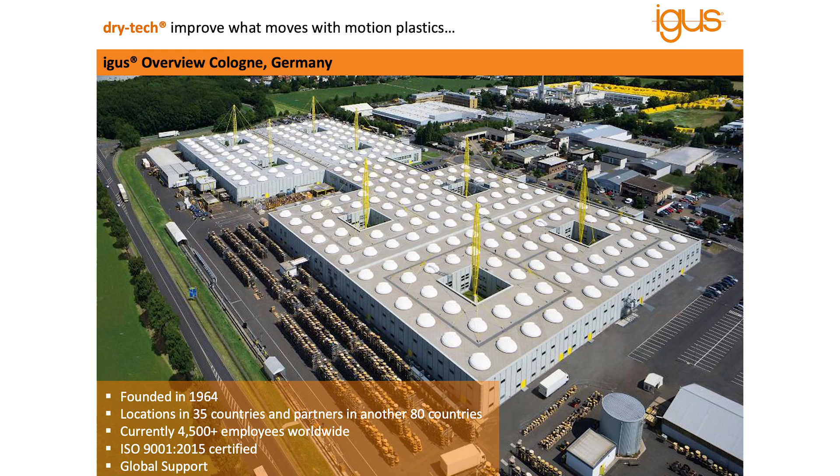I'm going to talk about igus Incorporated now, here in East Providence. I'm in our East Providence facility, and here we have just under 500 people in North America between the US, Canada, and Mexico. About 120 of those are factory trained outside salespeople who do offer on-site consultations as well as Teams calls. We have plenty of support.

We have groups of product specialists and inside sales here in Providence as well. From this facility, we ship about 85 to 90% of the product same day. So if you call in with an order in the morning, you can rest assured that if it's a stock part, no modifications necessary, we should be shipping that part same day. We also recently put online an injection molding facility here in Rhode Island at one of our older buildings.

We have headquarters of about 225,000 square feet. We actually have a couple of other buildings with just about the same amount of area, where, like I mentioned, we do injection molding and also have some off-site storage. We're also expanding here in Providence, where we have a lot of land that we're going to be building on in the next couple of years to expand and better support the customer base.

What are motion plastics? I mentioned that earlier. igus develops composites that are specifically used for motion projects. That can be anything from a bearing or an energy chain system. So when I say energy chain, I'm talking about the things that would guide and protect cables and hoses in dynamic applications. Something like this would be an example of one used on a lab device.

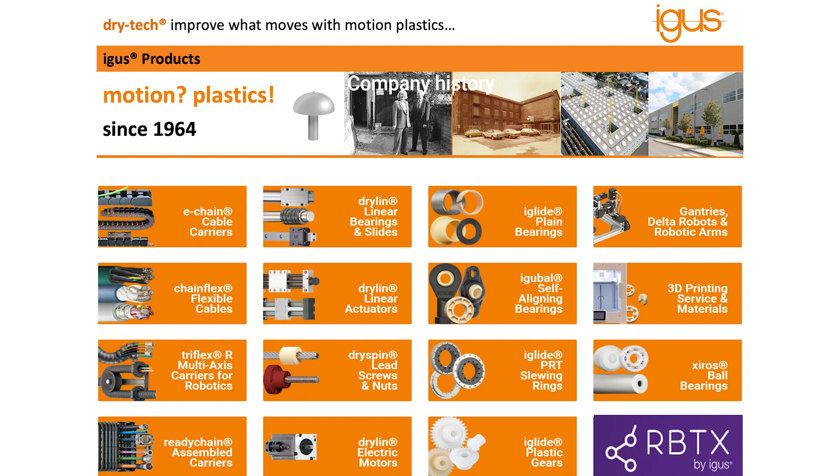And before I get into that, I should talk about the polymers themselves. So what is drytech? We do not provide simple plastic solutions for customers. We've been developing composites for linear motion and pivoting motion since the middle 60s. We use base polymers to get the general characteristics of the bearing we're trying to develop. That will dictate the speed, load, and characteristics for temperature.

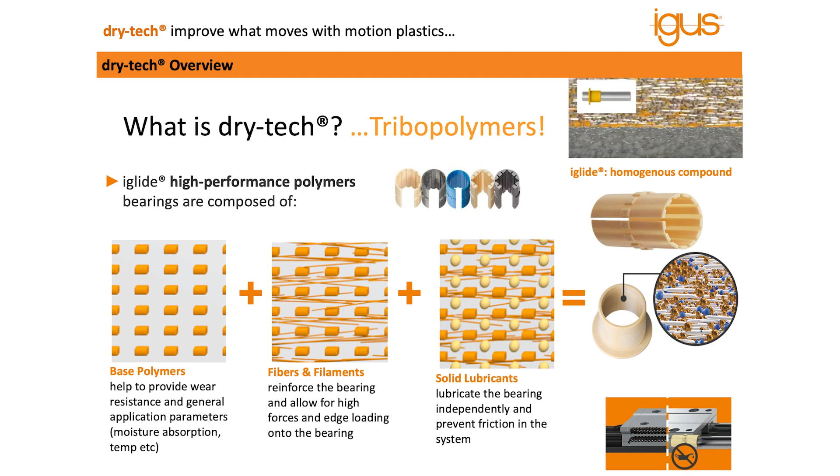To that, we add fibers and reinforcing compounds, could be carbon fibers, could be glass fibers. Into that, we also introduce solid lubricants, such as Teflon or silicone, although we are working on PFAS-free bearings as well, because we know that's a growing concern in the market. The main thing about all of our bearing materials is that they don't require lubrication. But how do you know they work? Well, igus has the world's largest motion plastics test lab in Cologne, Germany.

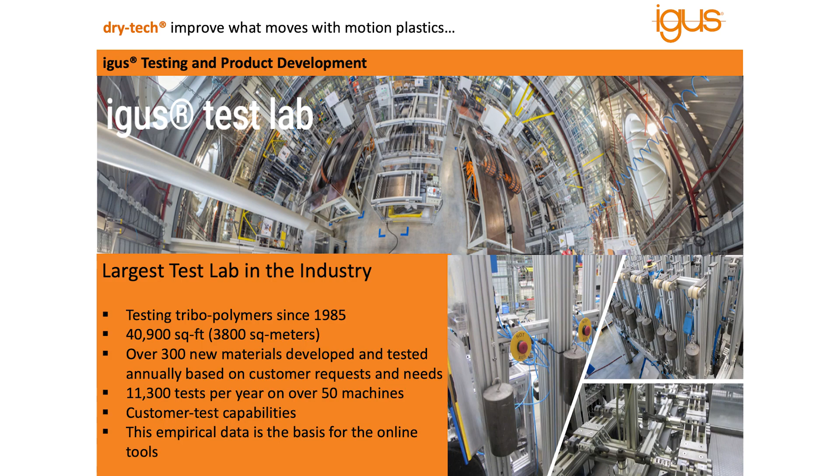We test over 300 new materials every year. We have 11,000 tests that we conduct across all the product lines. All of this information gets filled into our online configurators and expert systems, which I'll go through in a second as well.

Now, the main benefits of these composite plastics is that they don't require external lubrication. Basically, the bearing, as it moves along a shaft or guide rail, deposits its lubrication on the microfinish of the shaft. That never needs to be reapplied.

There's no maintenance. It is always intended to run dry, clean, and free of any lubrication. Aside from that, they are extremely lightweight. Our linear bearing systems can be as low as 25% the weight of linear ball bearing systems. Because they're plastic, they're very vibration dampening and quiet, about 4 times quieter than linear ball bearings as well.

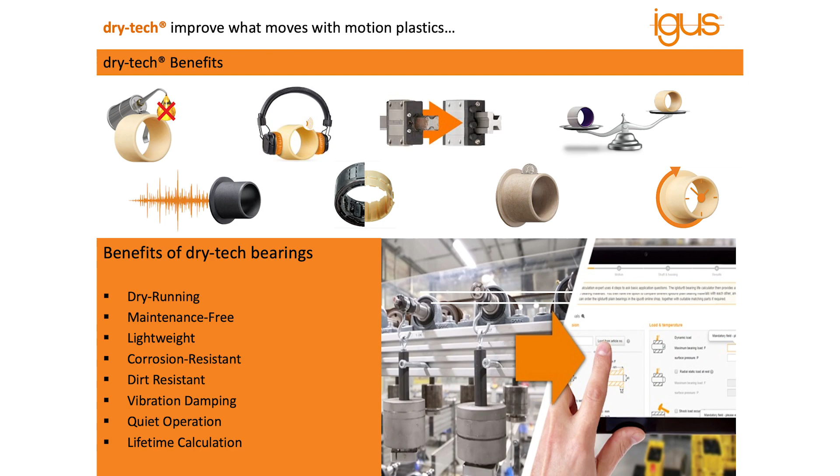And because they have no lubrication, they lend themselves to work very well in dirty environments, but also sensitive, clean lab environments, as you'll see in the next few slides.

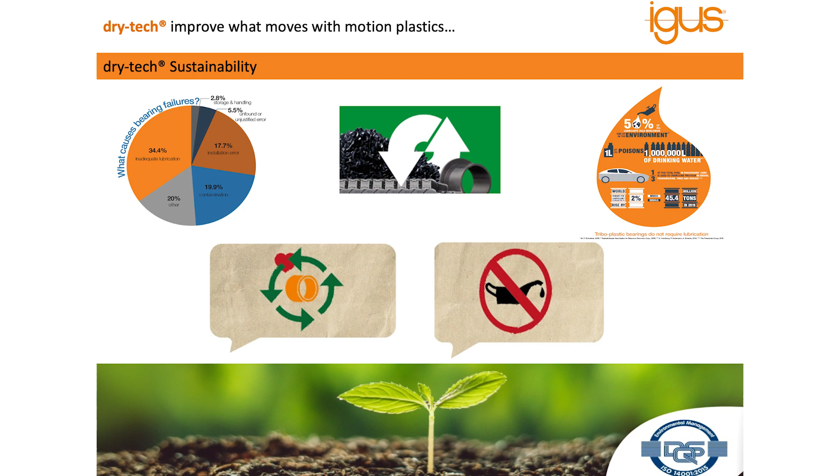igus is committed to sustainability. We realize we make plastics, but less than 0.5% of all oil consumption actually goes to the creation of engineered plastics. So our plastics are meant to improve machinery and remove any wet, oil, or grease lubrication in machines. Roughly half of all lubrication used in industrial use ends up back in the ground.

Also, more than 54% of all bearing failures are actually related to a lubrication issue, whether it was improperly lubricated or there was some contaminant in the lubrication. With igus, you don't have to worry about that.

Also, we use 99% of all of our waste material. Sprues from the injection molding process are reground and used for other purposes, other materials at igus. As well, last year alone, we planted more than 45,000 trees as part of an initiative to stabilize the carbon footprint.

But what is Drylin? I said that word earlier. It stands for dry running linear bearings. As you'll see here in a second, we offer more than just the linear bearing, but everything again is intended to be quiet, lubrication free, and work well, particularly in lab applications.

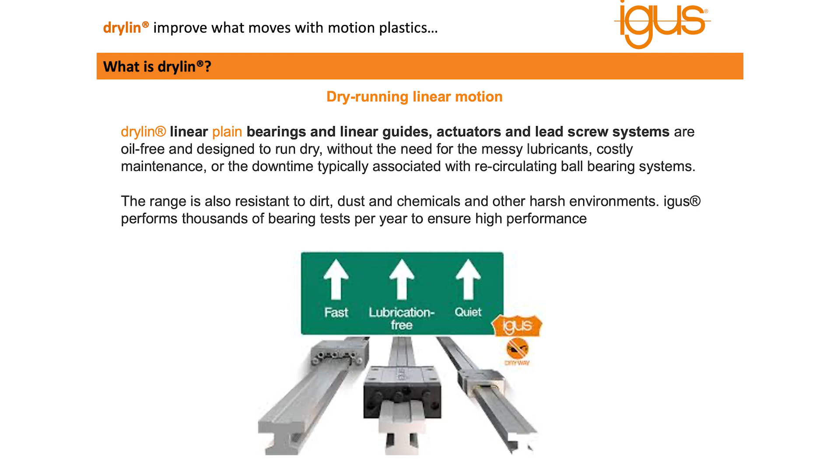So the product range itself ranges from our Drylin linear bearings and components. You can purchase just a simple liner from us. I shouldn't say simple, these are actually highly engineered for linear motion, but a liner from igus all the way up to a turnkey linear actuator, which could include sensors, cables, as well as our D1 motor control unit. So we have all sorts of options.

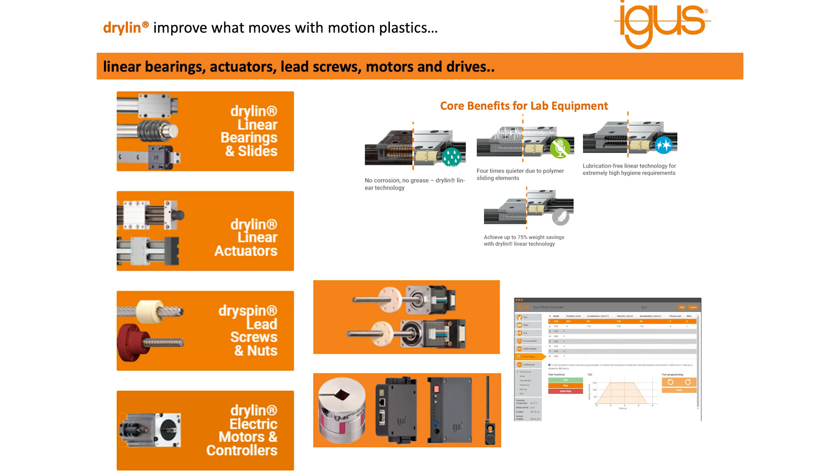We also have a lead screw series we call Dryspin, and we have tons of motorized solutions for that as well. So how does Drylin differentiate itself from ball bearings?

So most of our competition does make recirculating ball bearings. They do require grease and oil. There are certain times, of course, you need maybe the precision that a linear ball bearing has, but you're paying maybe for more and you're having to introduce lubrication into the system.

So whenever you can, we'd like to help you find ways to utilize Drylin in those applications. And because they're dry running, they work well with shocks, corrosion resistant. I'll go over materials here in a minute. They work well in dirt, and again, they're 4 times quieter and considerably less weight than linear ball bearing systems.

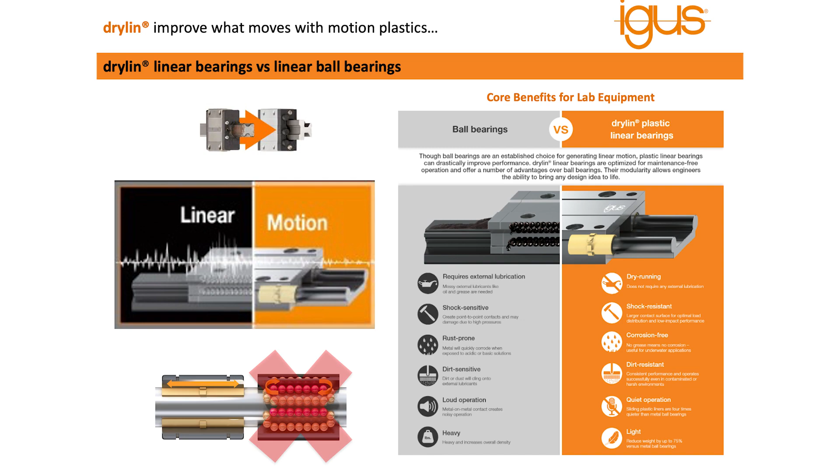There are a number of copycat parts that might look like Drylin in the marketplace. I kind of wanted to go over igus in particular because we've been developing these compounds, these bearing materials since really the 1960s. But Drylin first came out as a linear bearing product line in 1996.

The first material we used was this yellow material, which we call iGlide J, which although it was from 1996, we still use it in almost, I would say, most of our linear bearing applications. It has the best combination of wear and technical properties and costs that a lot of our customers are looking for.

However, we realize that there are applications sometimes where you want higher loads, or you want extra corrosion resistance, or you need to be maybe resistant to some moisture. We've developed other compounds for that. One of them we call X. X is a material that's capable of withstanding temperatures of up to 250 C continuous and is universally chemically resistant.

A newer material, this blue one here that we've developed over the past few years, is the latest version of our FDA compliant linear bearing material. We call this A160, and this works very well not only with chemicals but also with stainless steel shafting.

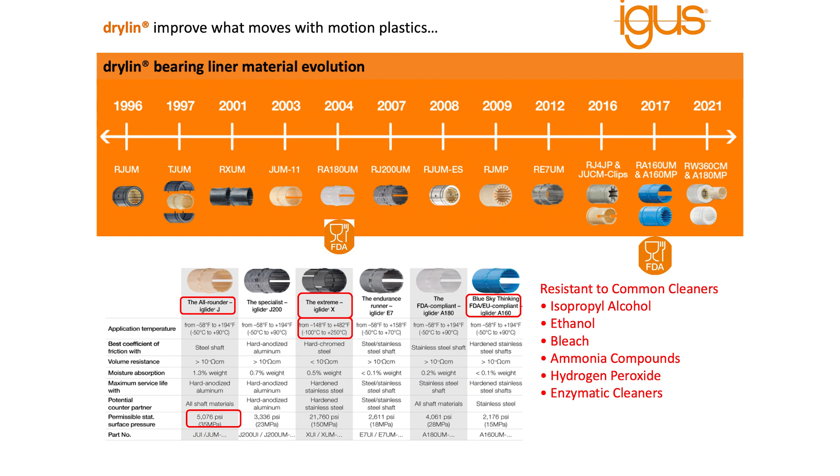All of these work with common cleaners in the lab related industries. They're listed here: isopropyl, ethanol, bleach, ammonia. They're resistant to those chemicals. You don't have to worry about the introduction of them into the bearing system.

As far as guide shafts, rails, and lead screws, the most common ones we supply to lab automation projects are stainless steel. One big benefit of using a dry running linear bearing, a plain bearing, is that it can work on soft shaft materials.

We actually have systems like this belt drive here that are based on soft stainless steels, 304. We have systems that are completely 316 if you need the ultimate in corrosion resistance. And all of our lead screw products are 304 stainless, or at least they're offered in 304 stainless.

We have housings made of stainless steel, and then a lot of the product lines we use in lab automation involve just a standard hard anodized or standard anodized part like this one here.

All of our guide rails come cut basically between 2 and 4 meter lengths in the back. There's no cutting charges. We cut them to your requirements and ship them out same day.

We have low cost zinc, which isn't always the best solution for chemistry in certain applications or chemicals, but we offer them in stainless steel as well as hard anodized aluminum.

If you're an OEM worried about the bare ends where we've machined or cut the rails, not only can we anodize the part complete, but we also have full machining capability for custom holes and custom drilling patterns in your parts. I should also note, most of this presentation is geared towards lab or diagnostic machinery.

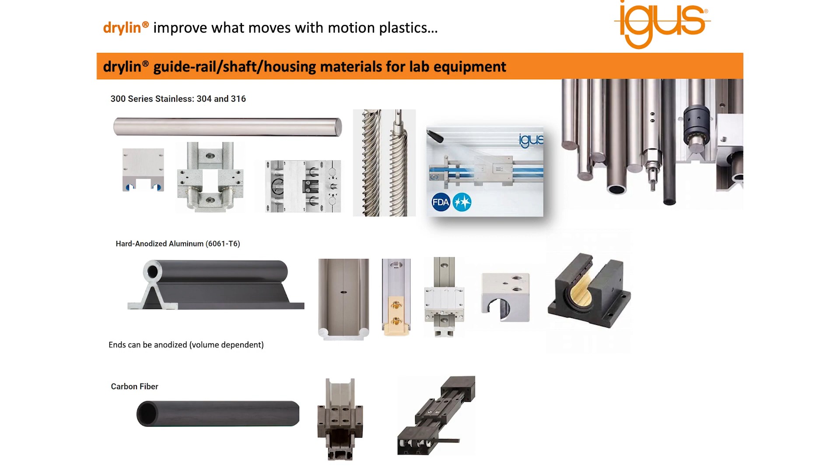But if you're working in the imaging sector, you may want MRI compatibility, non-magnetic components. So we do offer series round shafting in carbon fiber. We offer carbon fiber actuators as well as carbon fiber linear guide rails.

I mentioned earlier we have the world's largest motion plastics test lab in Cologne, Germany, 11,000 plus tests a year. All of that information gets fed into these online expert systems or lifetime calculators, as well as configurators. They're all available online.

These ones on the slide deck here are particular to the linear bearing products — anything from determining which actuator would work longest and best for your application. That system also provides information on motor torque requirements or can recommend igus motors.

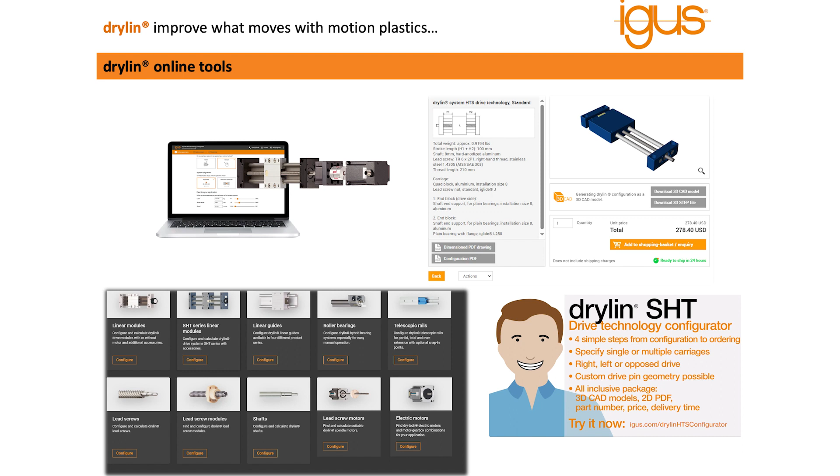Most of the expert systems will provide you a step drawing and a 2D drawing, and the ability to purchase the part online. In fact, if you purchase some of the actuators online using the expert system, we're now able to offer a warranty. More on that to come in the next few weeks, but that's something in the works.

But if you have a lead screw that you want to machine, you can go online, customize it for what you're looking for, and get provided with a 3D print, a 2D print drawing, as well as price to order the part right away.

So it's super easy. You can always use the configurators online, but another step would be to simply call igus. The contact information will come later in the presentation, but we have product specialists, inside and outside salespeople, willing to help you along in your application.

Okay, so now we're going to get on to the igus actuator offering, and we have a few different varieties. I've broken it up into what I'd consider our standard or classic actuators. Then we've really been developing miniature and smaller actuators for lab devices because we know that's what a lot of the market is looking for. And then we also have some specialists that I'll highlight towards the end.

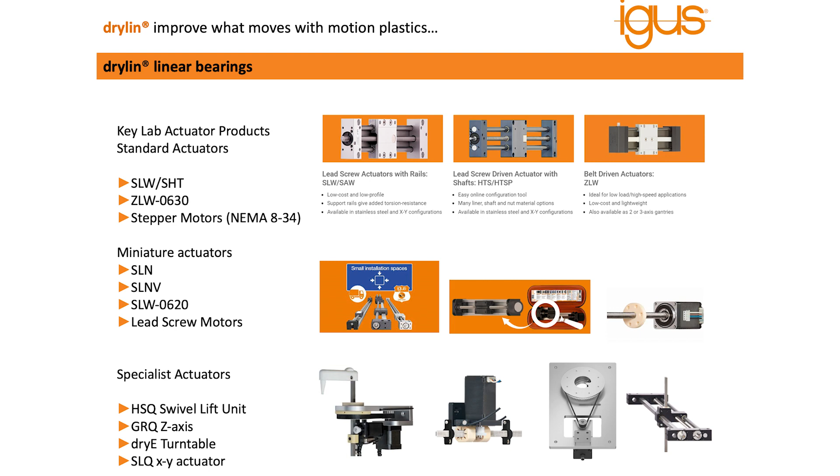To start with the classic systems, igus has two main types of actuators that account for 95% of all the product that ships from this building. We offer belt-driven systems — this one here is a very common size used in lab, called the 0630 belt drive. This is a 6mm diameter guide rail, so you can get an idea of the size.

This can be outfitted with stepper motors, which include encoders or brakes if required. We also have DC motors if you're looking for a more simple application. The benefit of the belt drive is that you can handle high speeds with low loads, much better than a lead screw system can.

I'll get into lead screws here in a second. But with these systems, we offer the brackets and the sensors as well, if you want to purchase those. And as I mentioned earlier, all the cabling that you would need to take your motor and your sensor information and encoder to the drive controller, which I'll go over in a second as well.

Now, these are cut from long lengths. So the parts online, or the parts on the screen, were shots from our website that are set at pre-cut lengths, because they're already ready to go and shipped to you. But it is very easy for these to be simply cut to length, and they're very modular.

So again, on the actuator configurator, you can actually change the direction of the motor. You can change which side the motor is driven from. You can change the length of the carriage. There's options you can utilize using the configurator for that.

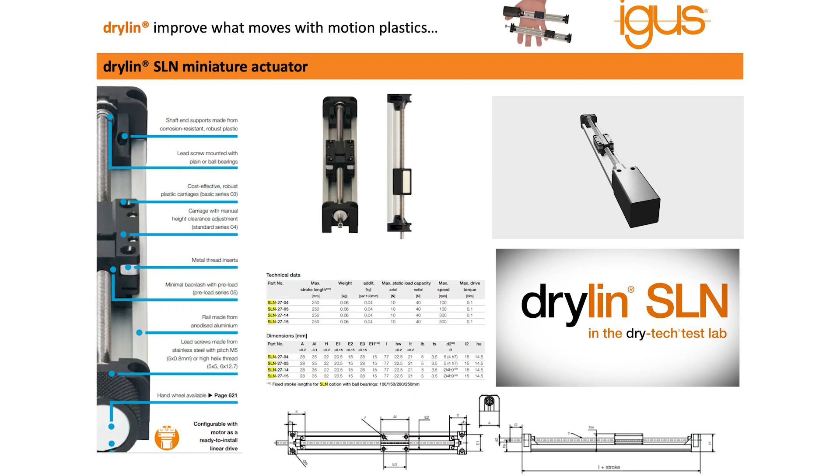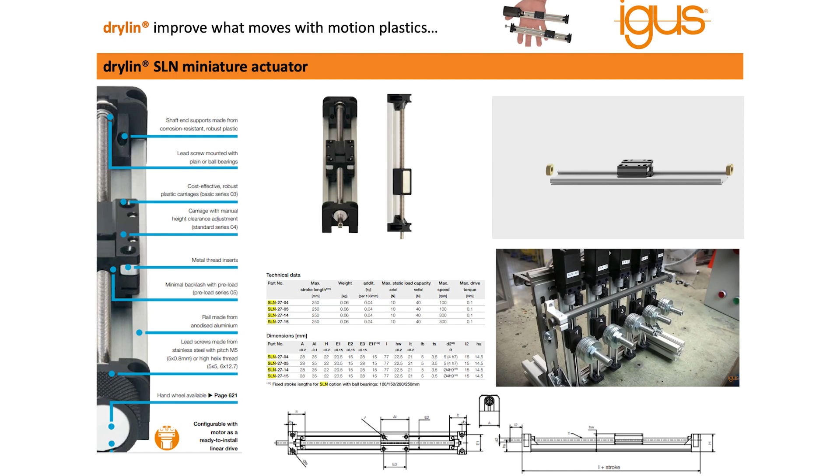On to the miniature series of actuators. So the first offering that we came up with, very popular in pipetting applications, has been our SLN. Again, this can be fitted with a NEMA stepper motor, and there's a version of it with preload.

The rails look similar. They're 27mm wide. This rail, however, is prism shaped on the inside and the inner guide surface, and basically the carriage has a constant preload guided by spring for those of you looking for more rigidity, more repeatability from your system. And again, stepper motor can or cannot be included depending on your requirements.

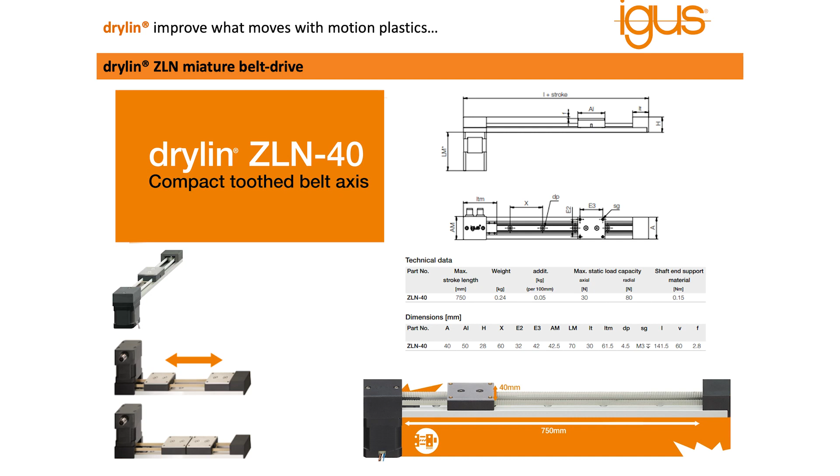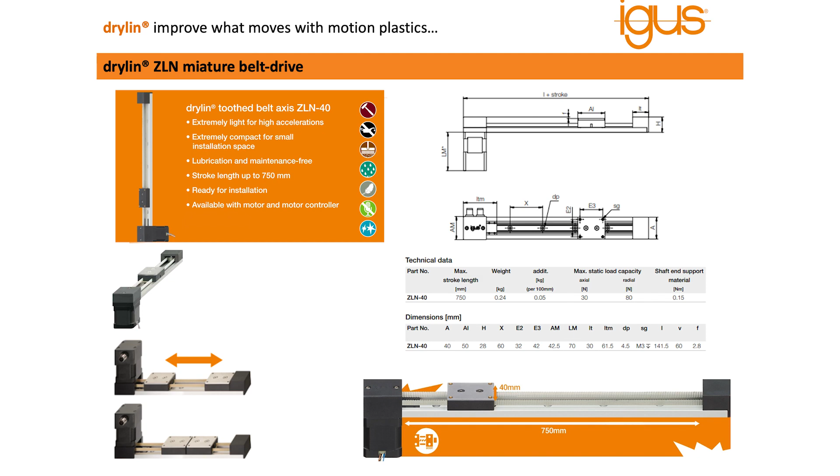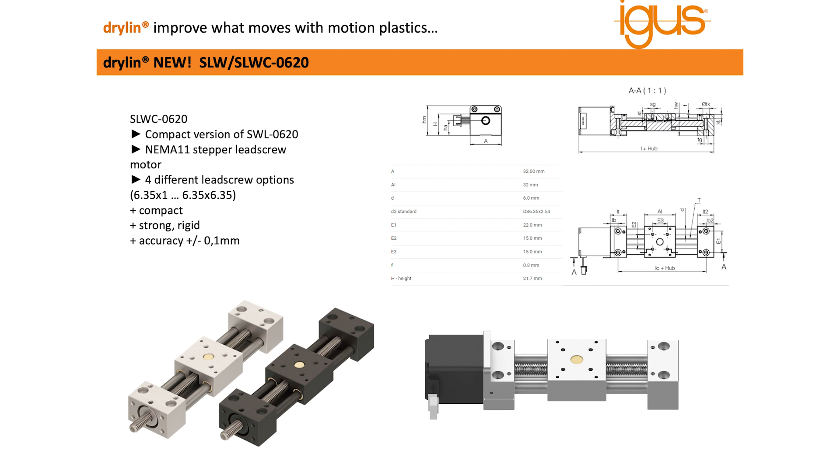We have a version of this as well. You can see in the PowerPoint deck where the motor can be integrated without a coupling by using a spindle motor, so something like this on the end, which can keep the part shorter in length, where we don't need to use a coupling or a special motor flange like we would on some other systems. So very compact, accurate, and very small.

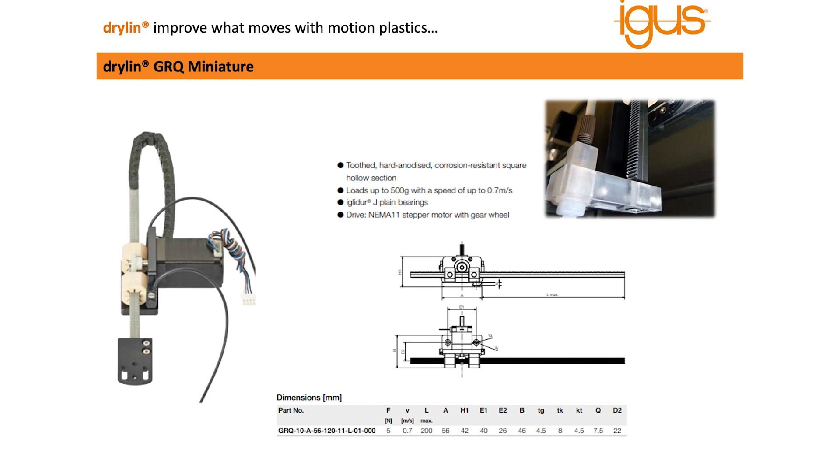And a couple of our specialist actuators. Here you see a GRQ. So this is a gear rack system used primarily for Z-axis, ideal for pipetting, ideal for small pick and place under 500 grams.

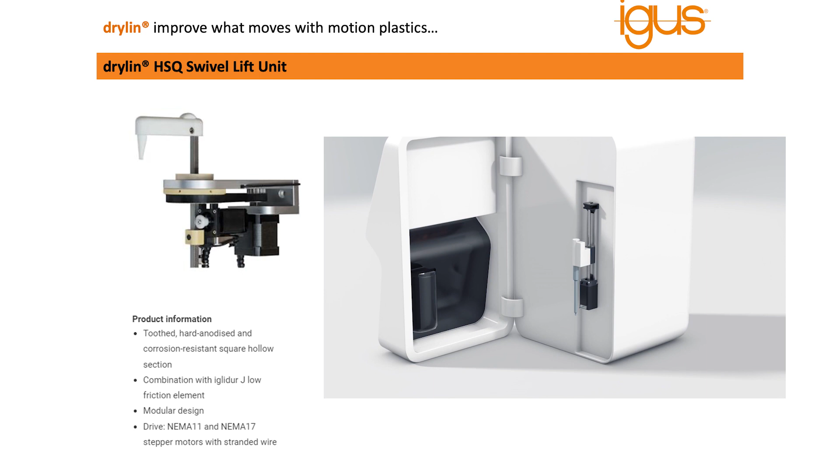And our swivel lift unit. This unit can be used in robotic applications for pick and place. It uses that GRQ gear rack that I mentioned for the linear travel. And then there's a polymer gear guided by a stepper motor. So it's a very clean, low-cost solution to possibly pick and place or robotic applications on your machinery.

Stepper motors, I think I mentioned before a few times that we do have a full line of stepper motors, from NEMA 8 stepper motor all the way up to NEMA 34. In fact, we have one that has 12 Newton meters of torque if your lab machines are getting extra large.

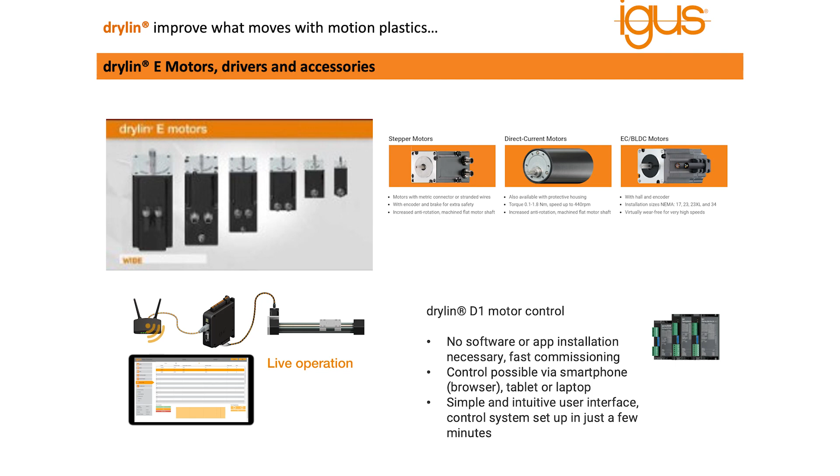But aside from that, brushless DC and DC motors, the best thing that we've come out with in the past number of years for our actuator to complement them has been our D1 motor control unit. There's no extra software. This will run all igus motors. It can be controlled from your smartphone. The user interface is super easy to use. It's free, and if you go online, there's actually links to sample programs that you can download and adjust, to watch how the application runs and maybe make tweaks. But it's a very, very neat solution here in D1.

And D1 is kind of the catch-all. We also offer scaled down versions of this if you're looking to simplify your controls in your application.

I wanted to really make sure that I hammered in on this particular subset of products from igus, and that would be our Dryspin lead screw systems, which we came out with maybe over the past 10 years. We've really developed these, and I'm pretty excited about the potential, especially in the lab automation sector. I mentioned earlier we have trapezoidal and Acme parts if you're looking for really fine pitch lead screws. But if you're looking for high helix lead screws, that's when we've developed this special one called Dryspin.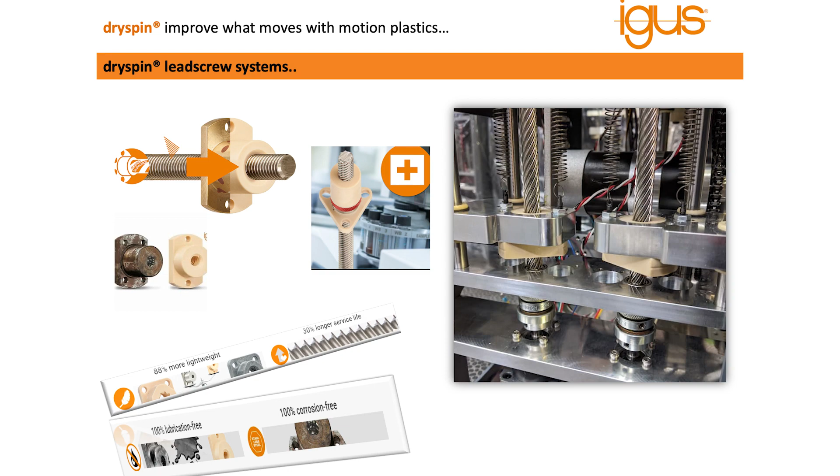Each of those can be used inside of a spindle motor actuator, and there's an online tool that can help size and determine lifetime in the spindle motor. But what's really great and exciting about Dryspin is that we research lead screws. We actually had made lead screw nuts a number of years ago, but we really optimized it, and I feel like we really nailed it with this product line.

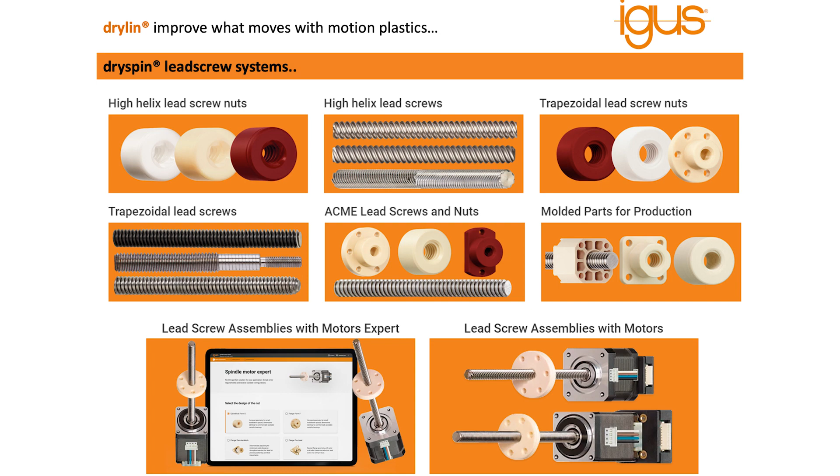Basically, we took the standard geometry of a standard lead screw and said, hey, you know what? The nut is the wear item. There should be a higher ratio of polymer nut to steel. By doing that, we get 30% more surface area of the plastic lead screw nut as a wear device, and also achieve higher efficiency, better efficiency.

And we rounded the corners. We've had a lot of problems that we've solved for customers who've had issues with lead screw noise in applications using other lead screw systems. Because our teeth are rounder and because of the shape of the part and our material, it's less prone to noise or vibrations.

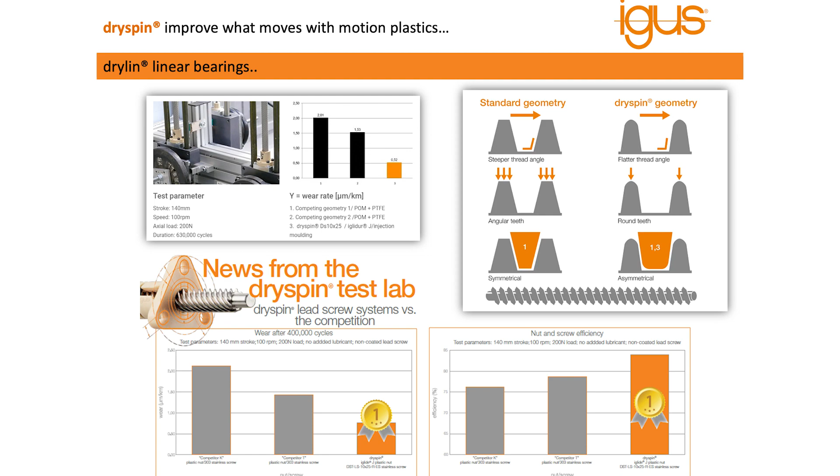In fact, we took a big block of our iglidur J material and we threaded it with 3 lead screws. Two of the lead screws were competitors, and the third one was the igus geometry. After we ran the testing, we realized that just by the virtue of the modifications that we made to the lead screw, the system lasted longer, the system was more efficient, and had better lifetime.

So that's a 1-to-1 just by virtue of the shape of the material itself, or the lead screw itself. Then when you add the igus material into the mix, you get the best of both worlds. Also, no Teflon lubricant or Teflon coating is required on our screw systems.

To get into a couple of applications, a lot of the work that we do has typically been in the diagnostic field, although I mentioned earlier we do have plenty of applications in imaging. We do have applications in other aspects of lab, but a lot of the applications that I'll show have to do with

diagnostic analyzers. So this was a system here where, we saw this earlier, but you saw an SLW being used as a pipetter in an application. A lot of our parts control the movement of syringes, pipettes, and valves to ensure accurate dispensing and mixing, and have to be resistant to different types of contaminants and particles of wear. So again, the lubrication-free aspect comes in, and they don't require maintenance down the line.

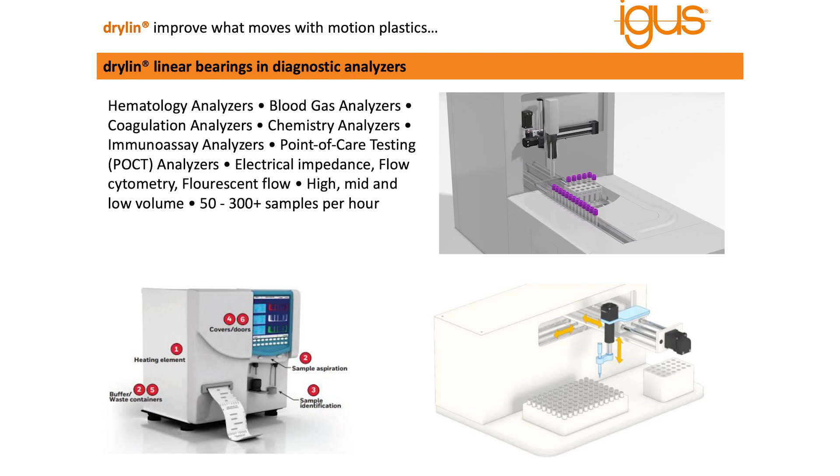Here is a plate handler, and it's for the insertion and removal of plates, which was formerly done by hand, so they've automated that task with this system that they created. It's using a number of igus components, from our energy chain to our slewing ring bearings, which are rotary bearings. It's depicted at the top of the screen with the arrow.

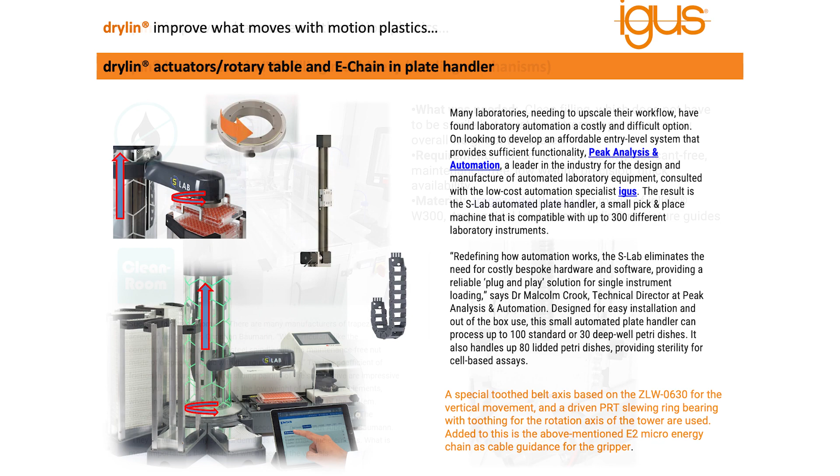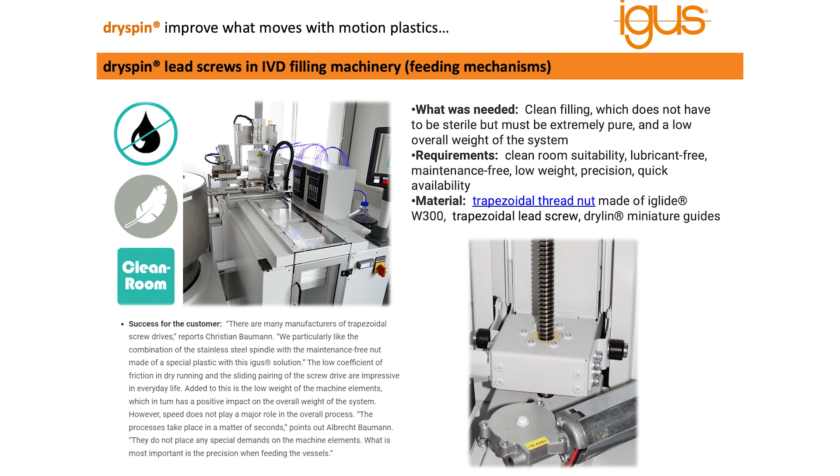As well as our ZLW0630 belt drive for the vertical application you see there. Here we are in an IVD filling machine. They wanted something rated for clean room, and our parts can pass clean room - there are different levels of ISO certifications for clean room depending on the application. In this case, they were using our trapezoidal lead screw nut, much like this one here, and our W300 material. They wanted a very clean system, and although it wasn't a sterile environment, they wanted to make sure it was near sterile.

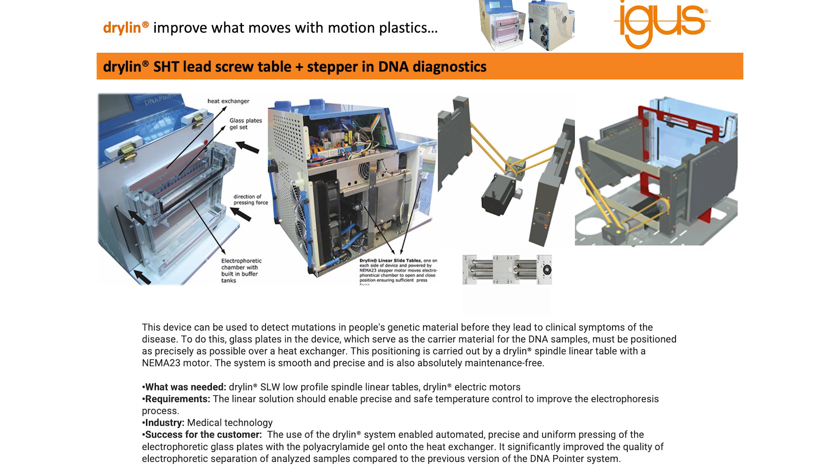Another DNA diagnostic machine here using our actuators. In the top right corner, we're moving the DNA samples over a heat exchanger, and that's being done by our igus Drylin linear actuators. Parts similar to this, a little bit wider, were used in 3 locations - again, lubrication free, maintenance free, lightweight. You don't have to worry about it once you install it.

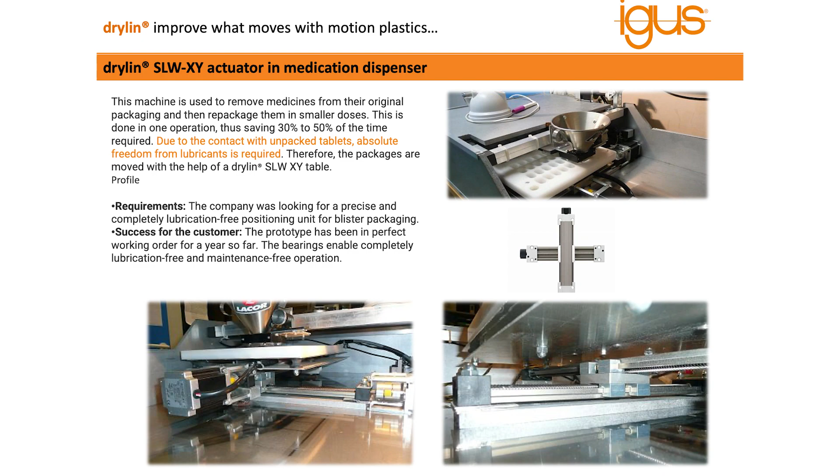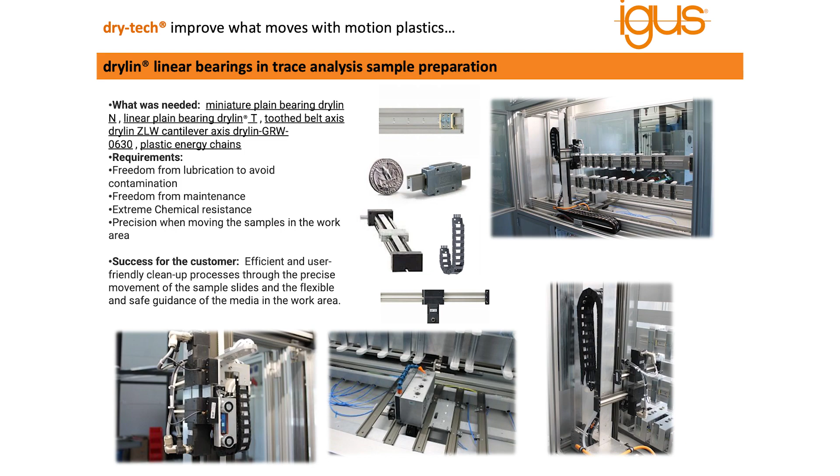Trace analysis, sample preparation, and cleaning using a ton of different igus parts - our Drylin T, a lot of them are here. By the way, if you want a box of laboratory parts, we have a small sample box we can give. Drylin T is this product right here - you can see it's quite small, this is the size 9. We actually go one smaller with the size 7. They're also using our low profile Drylin N guides, as well as energy chain and a belt drive.